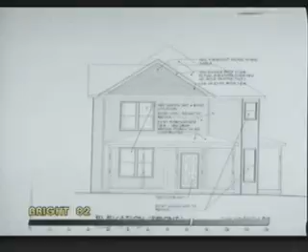And is the complexity of building forms compatible with the existing adjacent buildings? As you can see, this is what the applicant's proposing. These plans, I think you can see a little bit better because you have them in front of you. And so they're proposing to make a higher pitch on the roof and then to create—

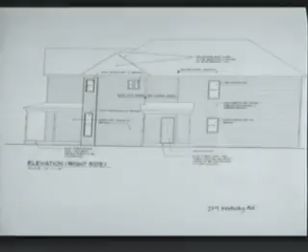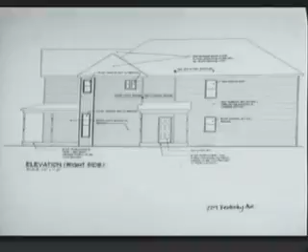There we go. Battery's dying. Create new gables on the side that would be consistent with the new roof changes, and to install a couple of new openings. We can go to the next plan, Randy. And this is on the driveway side.

In the rear of the structure.

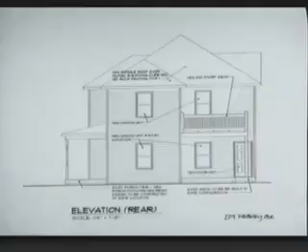So to continue with the findings: is the addition smaller and simpler to the original building in scale, design, and placement? Does the articulation of details and new construction relate in scale, rhythm, proportion, and texture to existing, adjacent, and surrounding buildings? Did the proportions, directional emphasis, and rhythm of the new building reflect the predominant proportion, emphasis, and rhythm of existing, adjacent, and surrounding structures?

Are the openings compatible in scale, size, and proportion to the established patterns of openings in the existing, adjacent, surrounding buildings? Are the materials in scale to the building which they are located and compatible with materials in existing, adjacent, surrounding buildings? And the applicant is here.

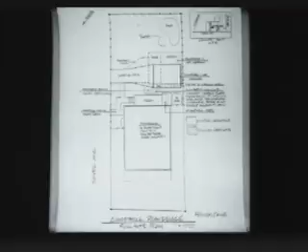We can go to the plans, Randy. Here's the site plan. This is the second-story deck, and then this would be the deck for the garage, and this is the 1.5-story studio. This is the existing size of the existing garage, and you can see the 2-story would expand out into the yard.

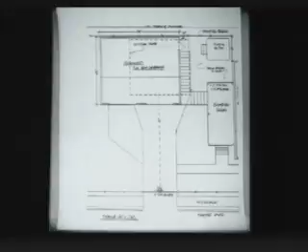We can go to the next plan, please. This is looking from the rear, at the rear elevation, side of the garage, rear of the house. So this is the studio, and the studio does not have access to the garage below, so the exterior stairs would be the only access to the deck and the studio on the second story of the garage.

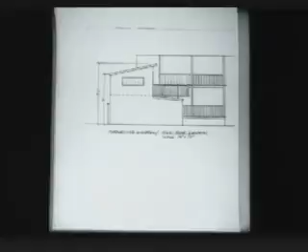Guidelines are included for your reference. Since this is a conceptual review, we have no findings at this time.

However, some issues to be considered would be: is the new stairwell appropriate? Should the new stairwell be located somewhere else? Does the proposed design disrupt the historic pattern of the neighborhood? Does the stairs connect to the garage in a manner that is characteristic to Belcourt?

Is the location of the proposed garage appropriate? Are accessory buildings located in character with the secondary buildings for the street, near an alley, or at the rear of the property, not close to or attached to the primary building? Is the complexity of the building form and shape compatible with the existing adjacent building?

Does the architectural detail and articulation of new construction relate in scale, rhythm, proportion, and texture to existing and adjacent surrounding buildings? Does the new building have the same number of stories, or is it within 10% of the average height of the existing and adjacent garages?

Is the setback consistent with other structures on Forest in Belcourt Historic District? Does the proportion, directional emphasis, and rhythm of the new building reflect the predominant proportions, emphasis, and rhythm of the existing and adjacent surrounding buildings?

Does the roof of the new building relate in shape, pitch, and materials to the roof of the existing and adjacent surrounding buildings? Are the openings compatible in scale, size, and proportion to established patterns of openings in existing and adjacent surrounding buildings? Are the materials in scale to the building to which they are located and compatible with materials in the existing and adjacent surrounding buildings?

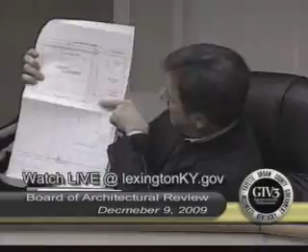Is there any problem with the connection from the deck to the garage? I think you might want to study that just a little bit further to see if maybe it could come off the end of the porch rather than coming off from a bay in the center. In this plan that you have here, you have it coming straight out here, the connection. If it could be here, I think that might be a possibility, or if there was some way to handle that whole piece, because I think it sort of slams into the historic structure.

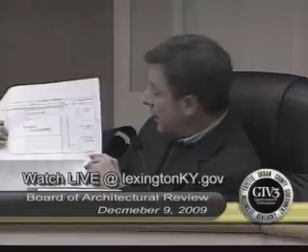My stairwell to go down has to be so long because of that drop. Oh, I understand, but there might be a way to do the rest of it as a switchback stair or something like that. I just think you might want to play with that a little bit to see if there's a way to push it off further, or even if it's still to the front, maybe push it down, pushed back, so it's not slamming into the middle of that bay of the existing porch of the historic structure.

Now, that plan doesn't match the plan on the first page, does it? Or does the deck overhang? The deck overhangs. Okay, that's why — this is the front of the garage, and this is the deck. The deck overhangs by a couple of feet. Gotcha.

Because my biggest concern when just looking at the first floor plan is that you've got one solid line of guardrail, one plane of guardrail, but now that I look at the second floor plan, which is what I was looking at all along, I don't have that same immediate concern. It does say it drops back — that's what I really meant.

Is anyone in the audience? Oh, go ahead, Sarah.